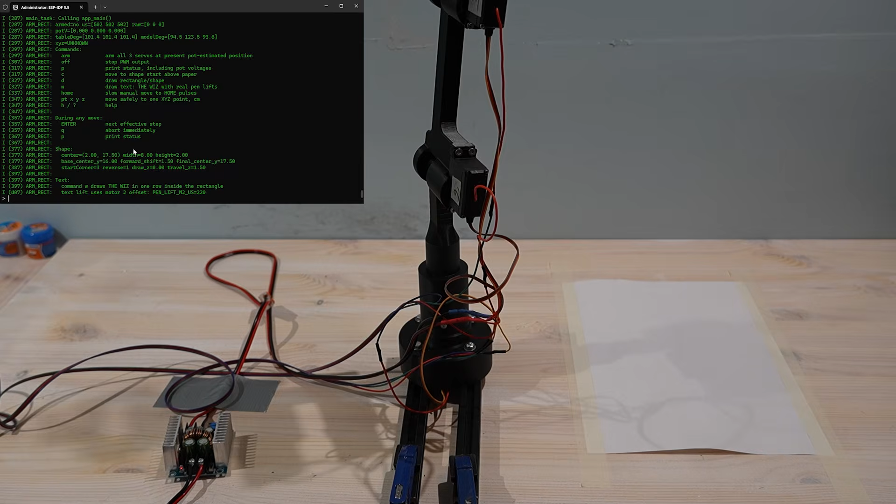For a long time, I've wanted to build a robotic arm, not just something that moves around, but something that can eventually move with real precision, closer to the kind of control you would expect from a serious machine. But before I can get anywhere near that, I need to understand the problems for myself. So I'm starting from scratch. The design, the 3D printed parts, the wiring, the code, the calibration, all of it.

Because for me, the best way to understand a machine is to build the first rough version and see where it fails. What you're seeing here is that first version. It can move, it can hold a pen, and it is already trying to write and draw. It is far from perfect, but that is exactly why it is useful. But every test also shows the limits, the flex, the backlash, the calibration errors, and the difference between movement and precision. That is what this series is about. Taking this rough first arm and improving it step by step. So let me show you how it started.

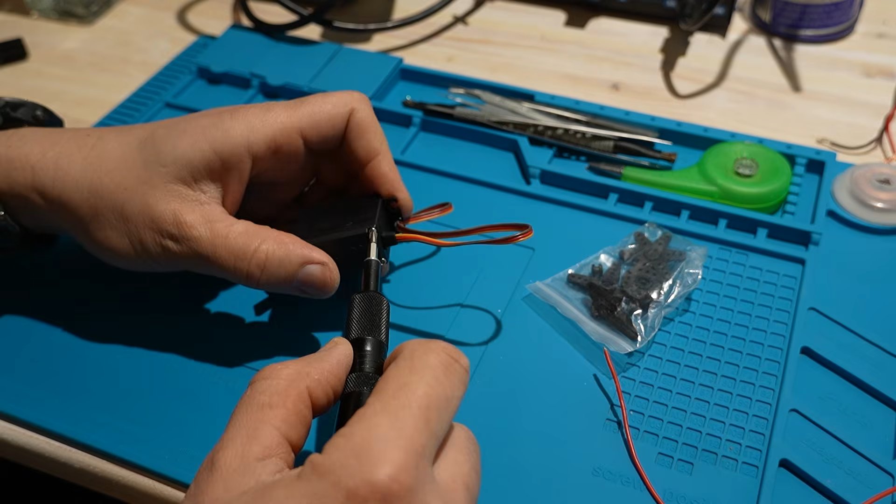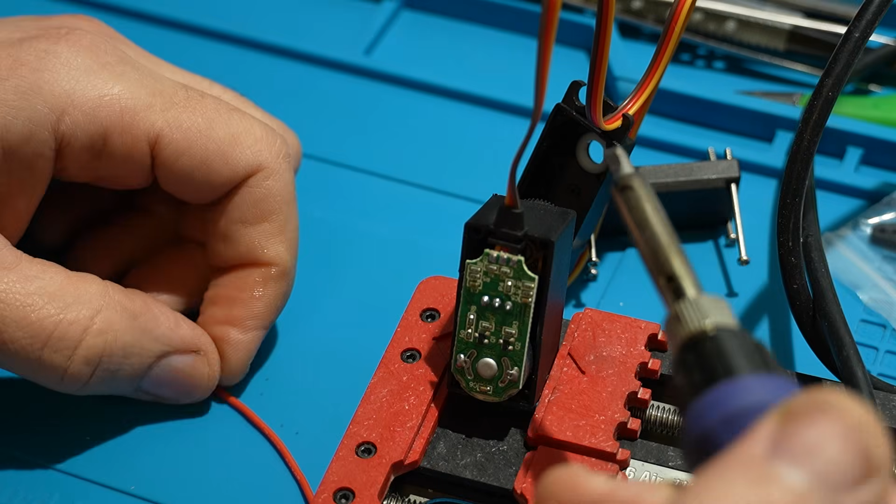The first important part of this arm is the motors. Without them, nothing moves, and without controlled movement, there is no robot arm. For this first prototype, I'm using cheap 180-degree hobby servos from AliExpress. They are rated at around 11 kilogram centimeters at 6 volts, and they have partly metal gears. They are not industrial motors, and they are not perfect, but for a first test arm, they make sense. They are cheap, easy to control, and strong enough for me.

But I don't want to use them completely blind. That is why I'm opening one of them here and soldering an extra wire onto the servo's internal board. And you may ask, why am I soldering a wire inside a servo? Glad you asked. Let's take one apart and look inside.

Inside the servo, there is a small motor, a gear train, a control board, and a potentiometer. The small motor spins fast, but by itself it does not have the torque I need. So the servo uses all these gears to slow the motion down and increase the torque at the output shaft. Some of these gears are metal, but some are still plastic. That means if the arm gets stuck, or if the servo is forced too hard, the plastic gears can strip very easily. So this is strong enough for testing, but it is still a weak point in the design.

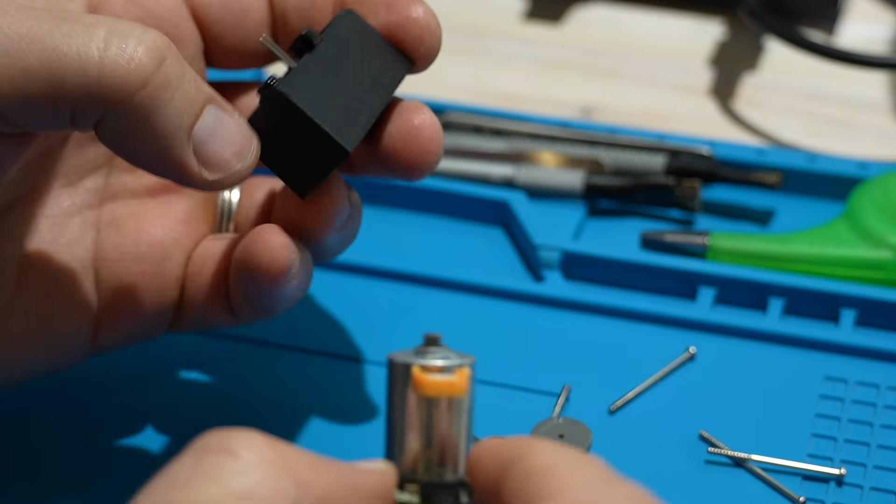The part I'm really interested in is this potentiometer. This is how the servo knows where it is. When the output shaft turns, the potentiometer turns with it, and the servo's internal controller uses that signal to know when it has reached the commanded position. What I'm doing is tapping into that signal. I'm soldering an extra wire to the potentiometer output, so the ESP32 can read the position too.

The servo already has its own closed loop control inside. I'm not replacing that, I'm just exposing the position signal so my controller can also see where the joint actually is. Later this lets me compare what I told the motor to do with what the motor actually did. That is important for calibration, for finding the real limits, and eventually for recording and replaying movement. So this cheap servo becomes more than just a motor I send commands to, it becomes a joint that I can measure.

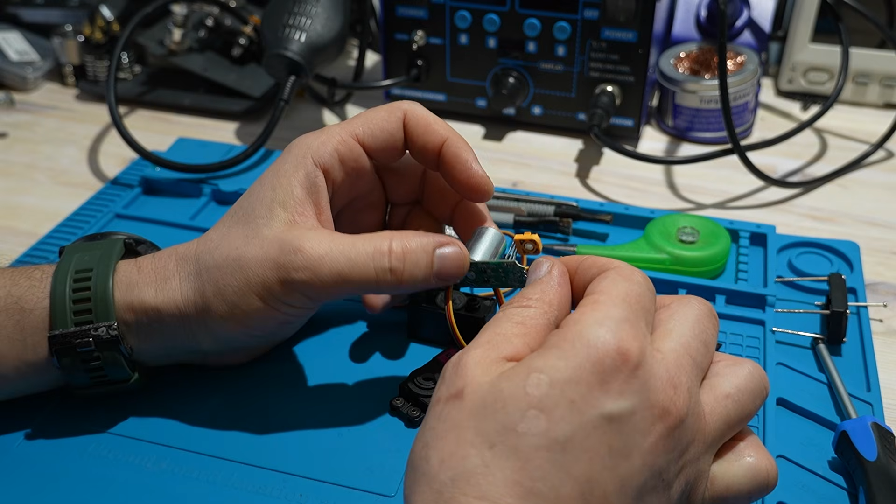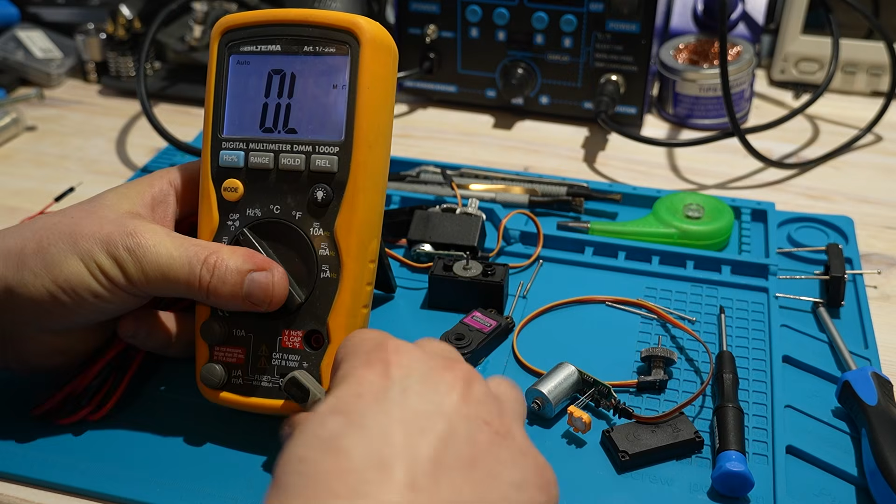Here I'm using a multimeter to test. The potentiometer has 3 legs. 2 of them are the ends of the resistor, and the middle leg is the moving contact, also called the wiper. When the shaft turns, the wiper moves, and the value changes. I connect one probe to the middle leg of the potentiometer, and the other probe to one of the outside legs. Then, when I turn the potentiometer with a screwdriver, you can see the resistance changing.

That changing value is exactly what the servo uses internally to know where the output shaft is. So the extra wire I soldered is connected to that position signal. When the servo is powered, that signal becomes a voltage that changes with the servo position, and the ESP32 can read it with an analog input.

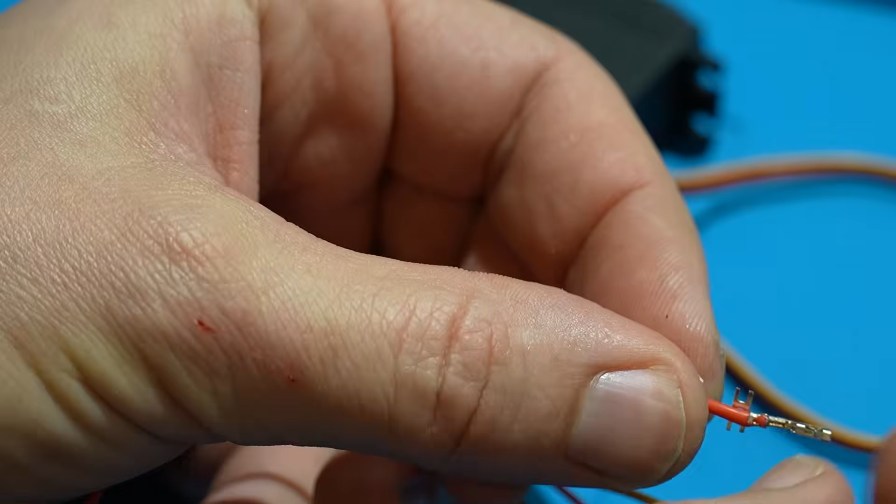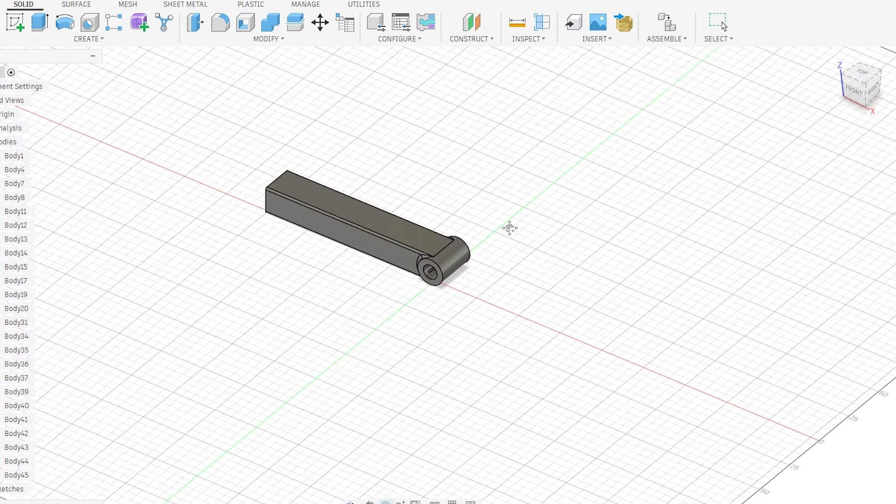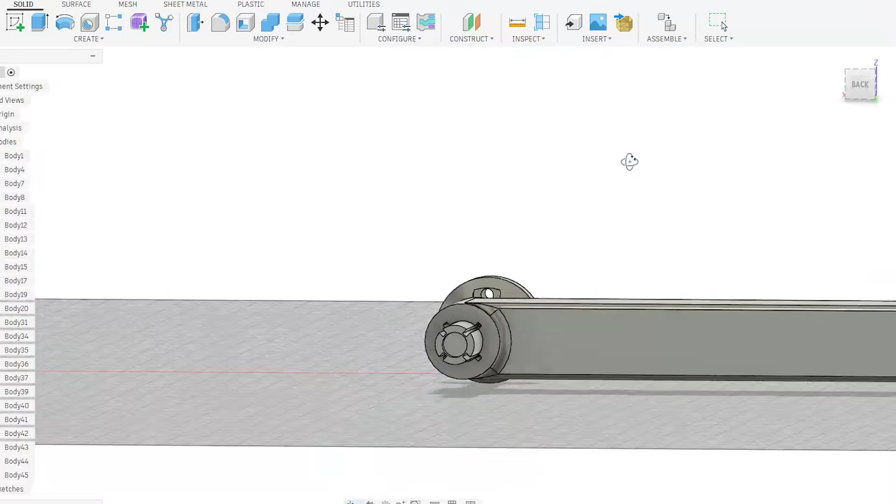Now I need to design the arm itself. For this first version, I wanted to keep the design simple and modular. In Fusion 360, I designed one basic arm link that I can print more than once. That way, if I want to add more joints later, I can reuse the same idea instead of redesigning everything from zero every time. The links are around 15 centimeters between the joint axes. That gives the arm a decent reach, but it also means the servos will have to work harder because the load is farther away from the motor. For now, I'm not lifting anything heavy.

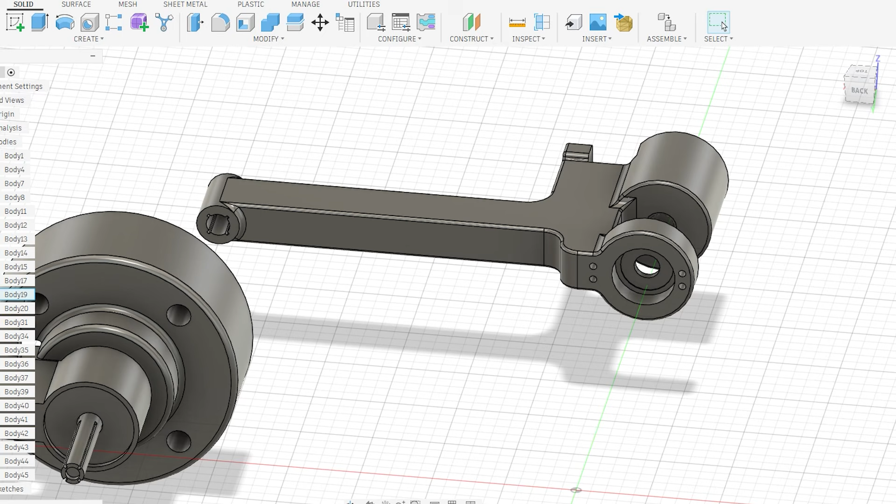I only need the arm to move itself and hold a pen, so this should still be manageable for a first prototype. I did not use pulleys, belts, or any extra reduction mechanism in this version. These are already servo motors, so they already have gears inside. For the first test, I wanted to keep the joints direct and simple.

The shaft design uses the same basic shape through the arm. I made 4 small keyways that fit into the moving shaft. The idea is that the keyways help transfer the rotation from the shaft into the printed arm link, so the joint does not just slip around the shaft.

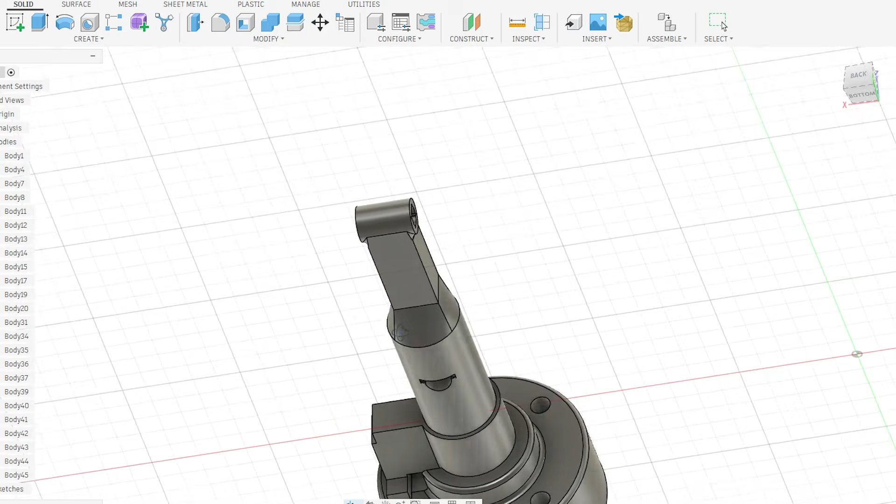For the joints, I used skateboard bearing 608, which are 8 mm inside diameter, 22 mm outside diameter, and 7 mm wide. So in the printed housing, the bearing seat needs to fit the 22 mm outside diameter, and the shaft needs to fit the 8 mm inside diameter. For this test, I only printed 2 arm links.

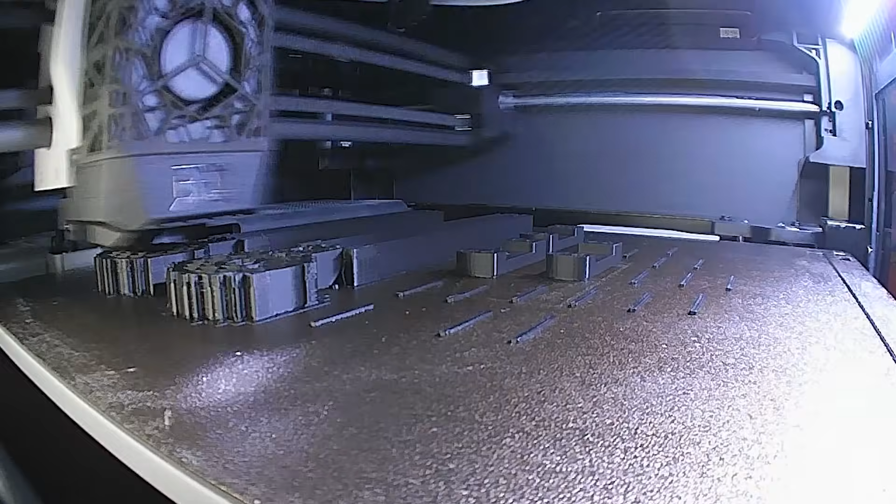First, I remove the support material and clean up the prints so the parts can fit together properly. After that, I glue the small keyway pieces into the ends of the links. These keyways lock the printed link to the shaft.

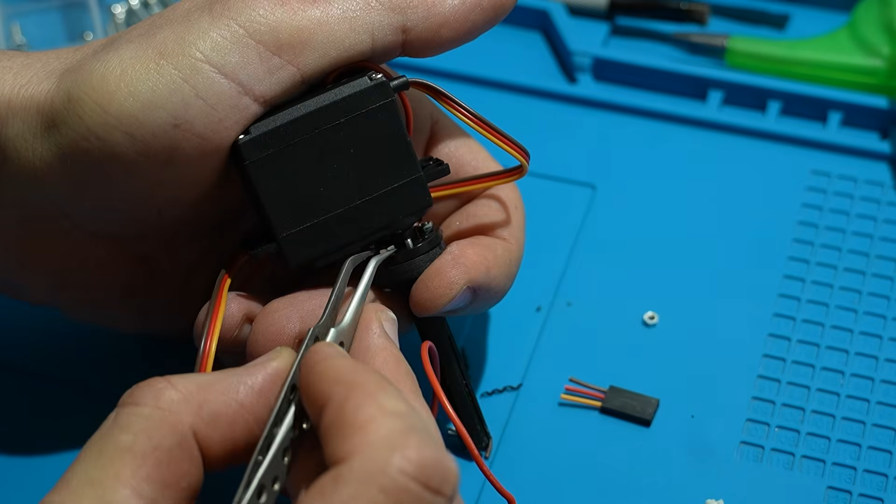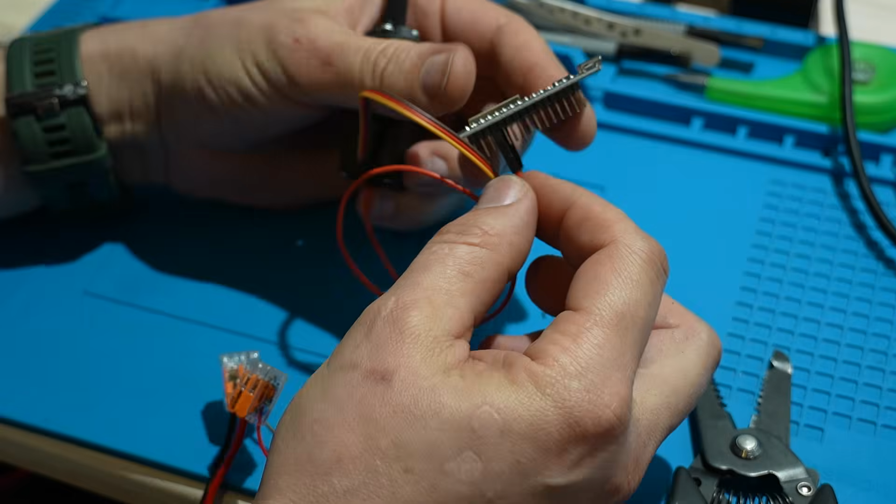Even a small amount of play at the joint can become a much bigger error at the end of the arm. For the wiring, I crimp small DuPont-style connector pins. This makes it easier to plug the signal wires into the ESP32 GPIO pins, and I can move them around later if I need to change the pin layout.

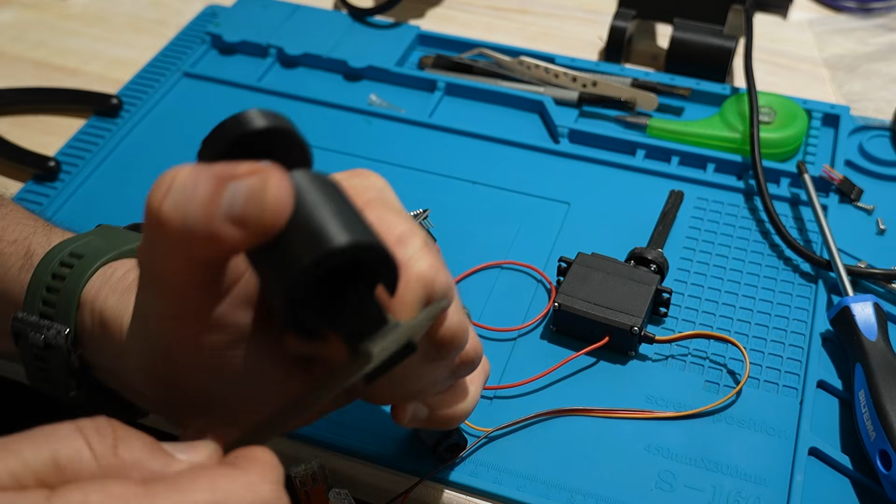Some of the printed parts are still a little too tight, so I use a small grinding tool to clean up the fit around the motor housing. That is normal with 3D printed mechanical parts. The model can look perfect in Fusion 360, but after printing, the real parts usually need a little adjustment.

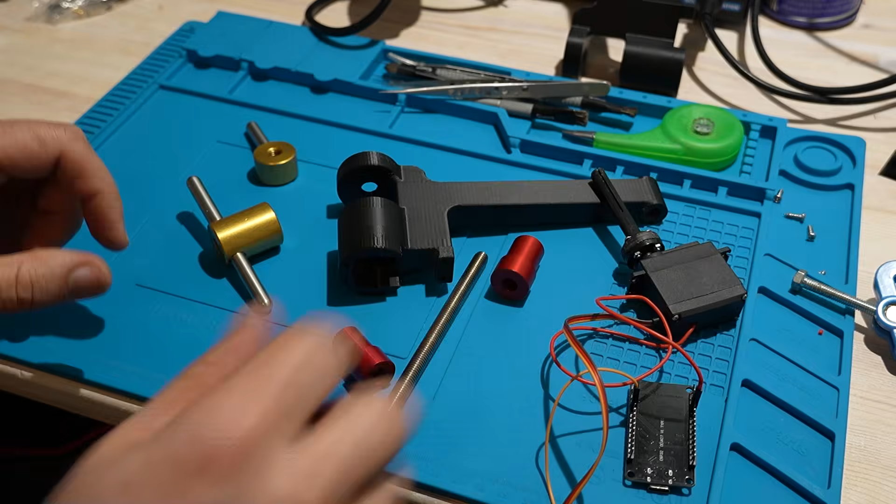To press the bearings in properly, I use a small bearing press tool. It is basically a threaded rod with handles and spacers, and it presses the bearing in evenly instead of forcing it in by hand. This tool is made for small bike bearings, but for this job it works perfectly.

Once the bearings are in and the fit is cleaned up, I start assembling the joint and connecting the next link. This part is a little more tricky than it looks because the shaft has to line up with the small key pieces I glued into the other link. I have 4 of these little keys, and they all need to be aligned before I can slide the shaft through the housing, through the bearing, and into the other side of the joint.

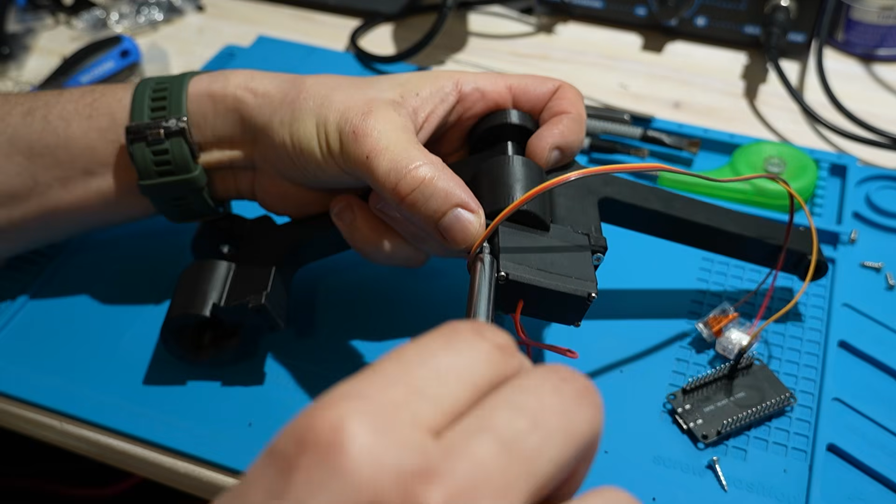It works, but this is also where I realize the keyway idea needs to be improved in the next version. Gluing the keys in place makes the joint harder to assemble. A better design would be to use screws from the outside of the joint. That way I could lock the shaft in place after everything is aligned, and if I need to remove it or adjust it, I can just loosen the screws instead of fighting with glued parts. For this prototype, it is good enough to continue, but this is definitely one of the first things I would redesign.

I use DuPont connectors for the 2 wires going to the ESP32, one for the servo control signal and one for the potentiometer feedback. For the power, I use Wago connectors to connect the servo power wires to the 6-volt output from my buck converter. This way, the motors get their power from the external supply, and the ESP32 only handles the control signal and the feedback reading.

After that, I write a simple test program, upload it to the ESP32 and test the joint, and finally the arm starts moving. For a first mechanical test, I'm really happy with this. It is not precision movement yet, but the basic design works. The servo moves, the shaft transfers the motion, the bearings support the joint, and the arm moves without any major problem.

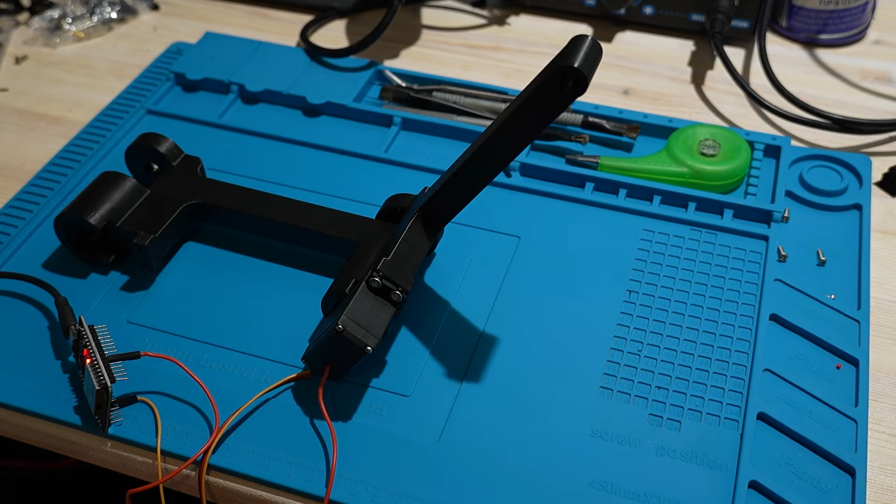This is it for part 1. In part 2, I will take this same idea and build the full arm. I will print the rest of the parts, assemble the whole robot arm, mount it properly, wire everything, and start testing the real movement. Thanks for watching.